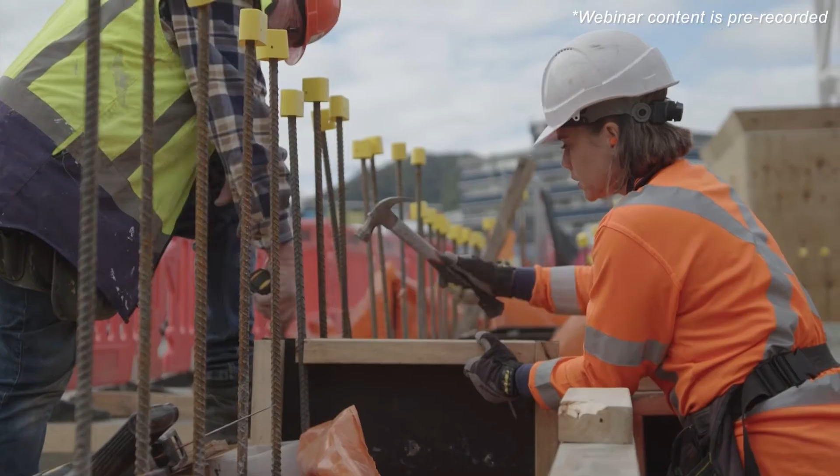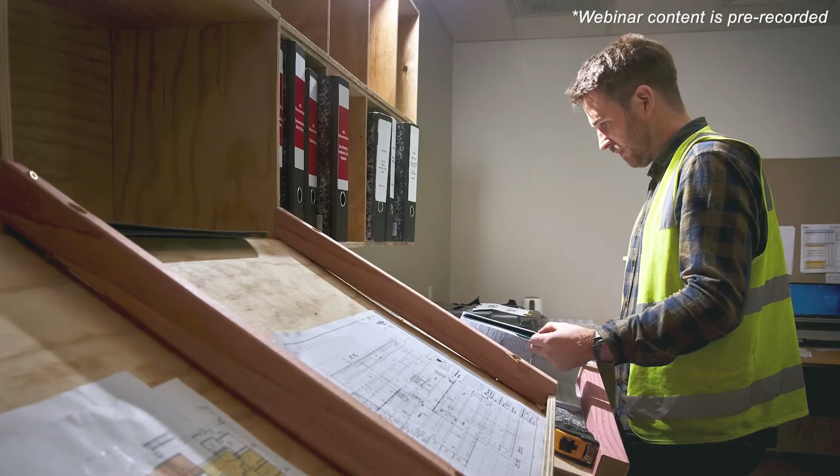Construction touches us all in some way, and its success is crucial for a better Aotearoa. The Accord was launched in April 2019 to try and address the many issues affecting the sector. The Construction Sector Accord is the first step in creating a strong partnership between government and industry. And the partnership is to create a high-performing construction sector for a better New Zealand. The Accord has big goals: increase productivity, raise capability, improve resilience, restore confidence, pride and reputation.

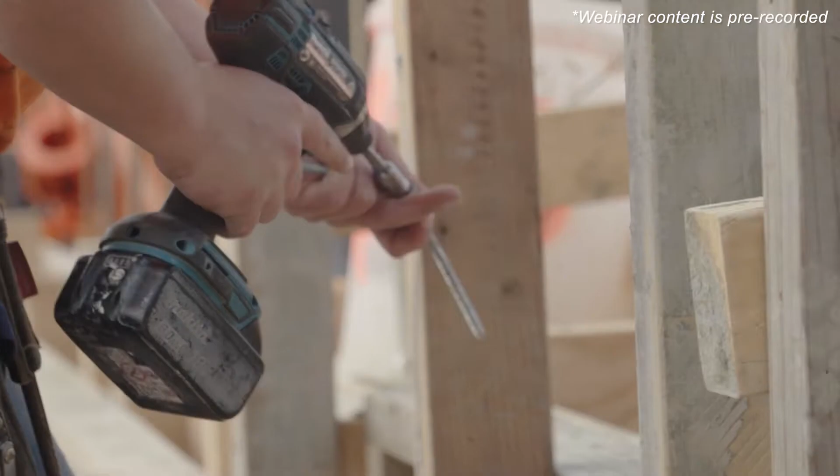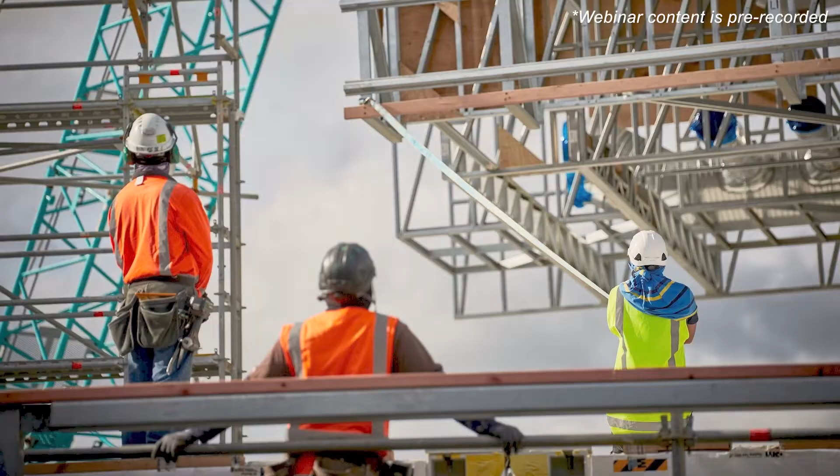The Accord's work is about driving long-term culture change, from increasing diversity in construction to reducing carbon emissions. We want to see better business performance, better leadership, better health and safety culture, including mental health, fairer risk allocation. We want to see a safer, more successful, more sustainable construction sector. By working together, we can achieve that vision.

So one of the key things we've done is we've invested in a collaborative environment called Revizto. And so that enables all of our external design teams and internal design teams to come into the one space, coordinate their design in the digital world. And for us, that reduces the risks in the physical world when we're actually on site. So it lets us be more in control and gives us more confidence about what's happening in the design and how that's being coordinated.

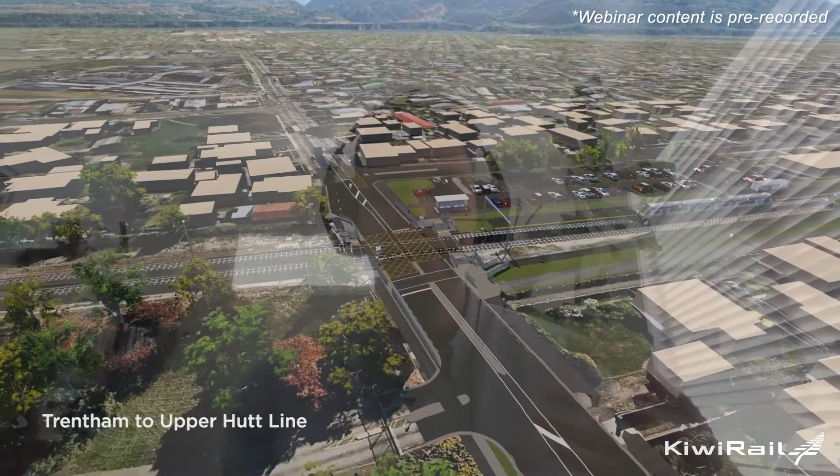So the other part of that is KiwiRail's taken the kind of bold step to provide all of the licenses for that software. So for us, we provide licenses to both our internal teams and our external teams, because we don't want that to be a barrier to people having access to the information. So that's 3D and 2D information.

And for us, that means a license is a lot cheaper than some of the cost of when things go wrong on site. So yeah, it's a good example of the things we're doing. Now, I've seen the video on this one, your Digital Shields project. This is seriously cool. Tell me more about it.

Yeah, sure. So the Digital Shields was something that came out of the BIM pilot. And the BIM pilot for us was where we started doing digital engineering, and that was the genesis of the digital engineering program. So again, it speaks to we need to be more productive, but also we don't have a lot of access to the rail corridor, and we need to keep our people safe.

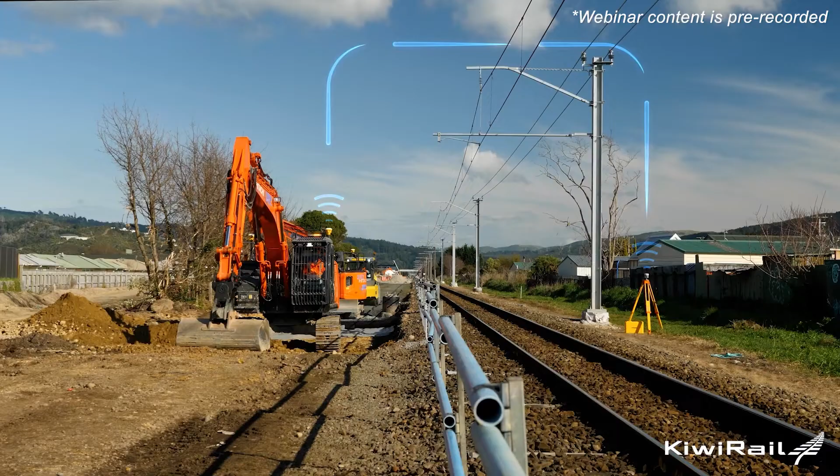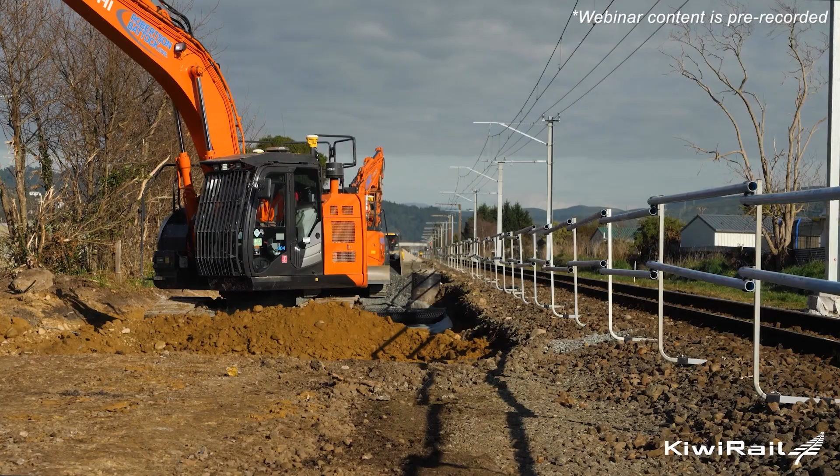So that's something that was trialled on the Trentham to Upper Hutt project in Wellington. And over the last 12 months, we've been going through the processes of all the documentation and all the other bits and pieces to scale that up and make it part of our BAU for our business. So the next two big projects that are currently using it are the Plimmerton upgrades down in Wellington, and then the Wiri to Quay Park project in Auckland. So what are the key outcomes for you?

Yeah, I guess everything we did under the BIM pilot proved the value of scaling the DE program across our capital works portfolio. So for us, there were four key objectives. It was store data in one place, and that led to us developing our own common data environment. Reduce risks in construction, so that was where our collaborative environment, Revizto, came into play, and that's what I was speaking to around, coordinate it in the digital world before we go into the physical world.

Produce really good as-builts. So we know that when we're doing capital works projects, we've got a massive opportunity to capture some really good data about our assets that will be used well beyond those projects. Typically the industry is not so great at capturing as-built data and handing that over to asset owners, and that's just for a number of reasons. So we're really working in that space to develop that information.

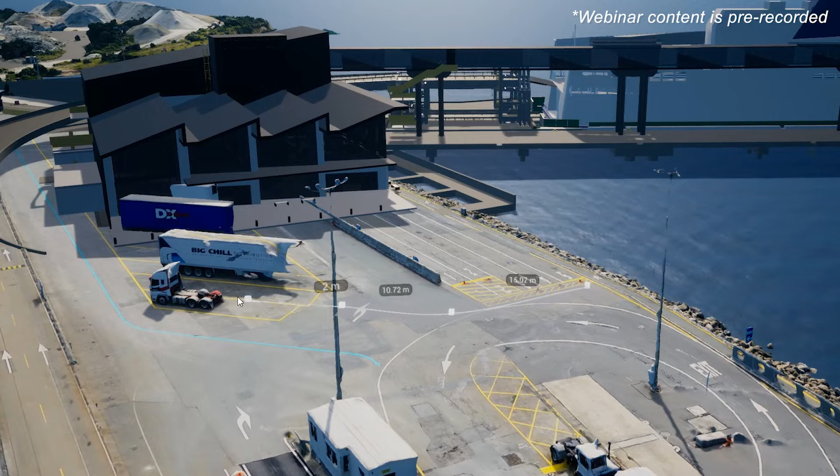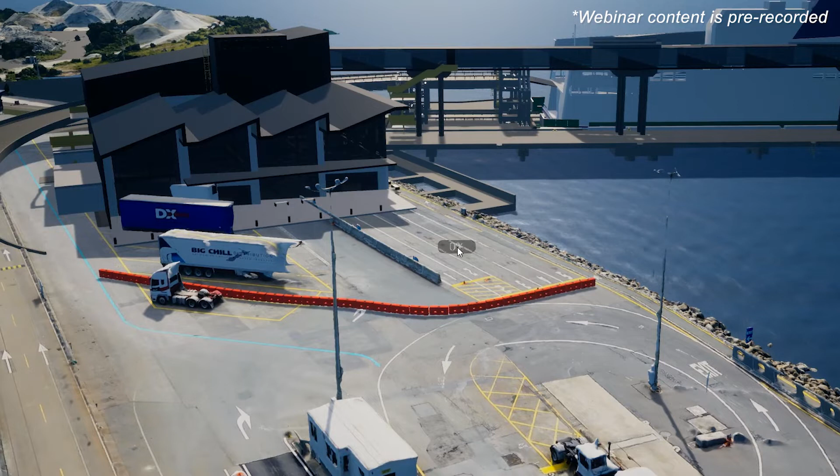One of those key things is gamification. So we're doing a lot of work around bringing information into gaming environments so that people can interact with it in a different way. We have a lot of stakeholders, both internal and external, that need to be consulted with to get their input into things. And traditionally, they would often get a technical drawing and they might not be from a technical background. And so their input might get lost in translation, or what is being asked of them might get lost in translation. And that can result in things not coming to fruition and challenges later on.

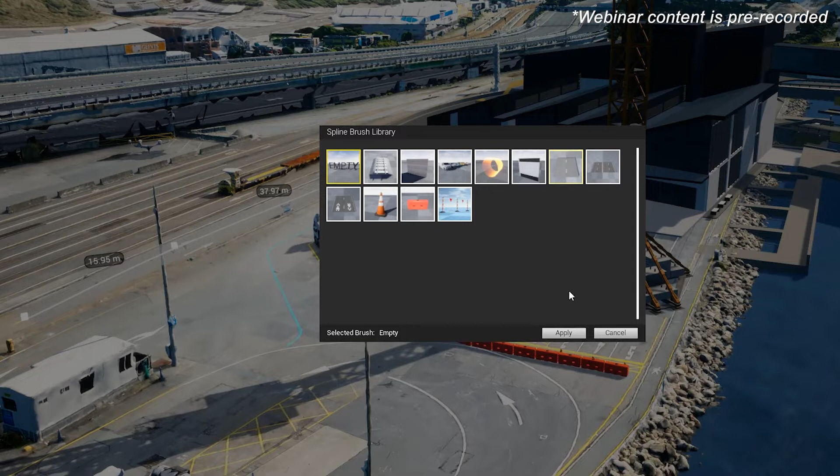So one thing we've been trialing with the IREX project down in Wellington is we've brought the design into a gaming engine, and then we're using that gaming engine to interact with different people and show them the design. We can put things in the environment on the fly. In there, we can put in temporary roads and cranes and things like that and show them what the impact would be while we're doing that and get their feedback on that.

Oh my God, I actually just said search up. Blame our kids for that.

By the way, here at the Accord, we're working with KiwiRail on an asset owners forum. And this is dedicated to creating consistency with digital change and data requirements across the sector. The forum includes groups such as Waka Kotahi, University of Canterbury, Let's Get Wellington Moving, and Auckland Transport.

And look, more generally, we're really pushing that sort of peer-to-peer horizontal learning network. That is the best way to learn.

Anyway, next up, Johan Betts from Offsite Design. Kia ora, Johan. Thanks for the introduction. Great to be here and looking forward to sharing some thoughts about offsite manufacturing and offsite construction. So, Offsite Design, a leader in designing and manufacturing prefabricated timber buildings from small residential to multi-storey commercial. Firstly, Johan, offsite construction, why is it so important for New Zealand?

Yeah, prefabrication and offsite construction, the way we're using the terms, is really just a catch-all term for a whole bunch of methods, systems, techniques, technologies that allow us to build away from site and assemble quickly on site. And that means we're covering a huge spectrum of types of construction. Panels, open and closed, 3D volumetric modules, whole buildings, and across all the materials, so concrete, timber, steel, etc. And that means it's actually quite difficult to talk with people about prefabrication and offsite construction.

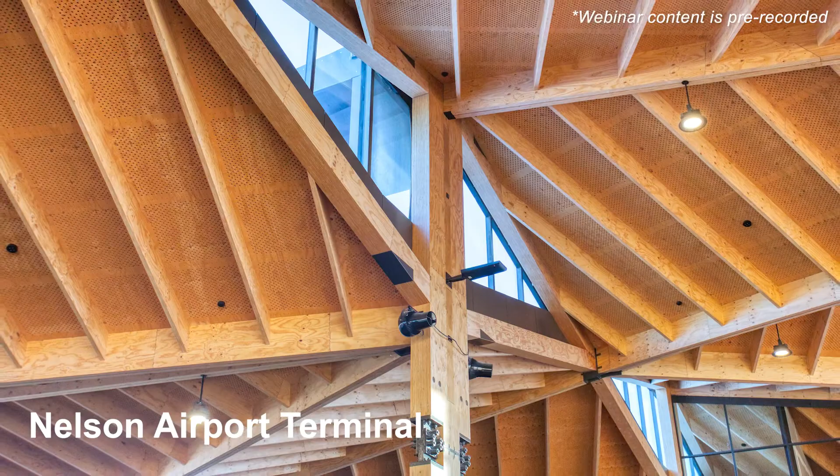In the commercial space, the projects we're working on are typically mass timber, multi-storey. So that's typically 3-4 storey public buildings. There's a number that we're involved in at the moment down here in the South Island. So that's the Ashburton Civic Centre being built in Ashburton at the moment, a Polytech building down in Dunedin, and another mass timber building going through that pre-construction process at the moment that's going to be built on the AgResearch Lincoln campus.

But one thing to point out really is that Offsite Design, on most of these projects, is getting involved after the design has been finalized. And the role we play then is that we coordinate and we find the details that are not producible in the factory or not buildable on site, and we help the prefabricator and the contractor through that. So the point I'd like to make is that very few projects in New Zealand are actually optimized for this offsite manufacturing and offsite construction process, and that's where New Zealand needs to do some work.

Other types of work that Offsite Design gets involved in is consulting to the prefabricators, so essentially helping prefabricators get into prefabrication. So if there's a prefabricator and they want to start making things offsite, then we can do some consulting on their building system, help firm up that system, and even sort of help with tailoring a factory around that.

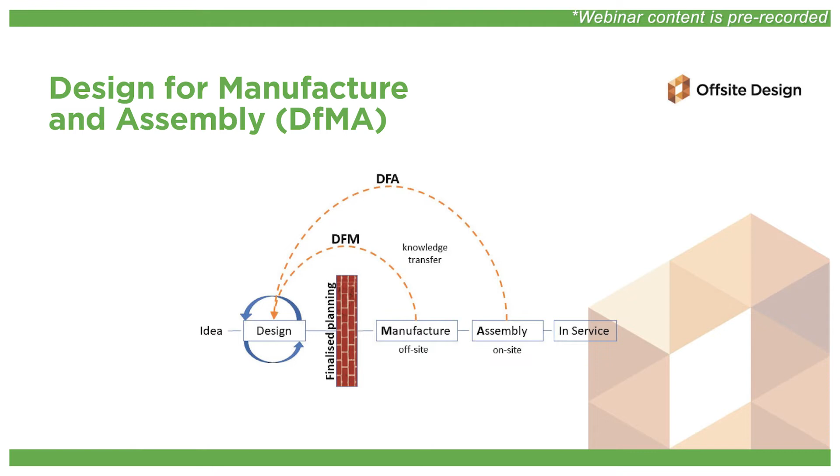And it's impossible really to overstress the importance of that. It's also something that typically designers, architects, engineers can't do by themselves. So DFMA, Design for Manufacture and Assembly, it's really a collaborative process involving a contractor and supplier early. So that's a big barrier, that the projects that are being prefabricated in New Zealand, very few of them are really optimized for true DFMA.

Another one, and that goes really hand in hand with the first point, is the procurement. If design of an offsite project is contractually separated from the construction, then it's really impossible for that manufacturing or offsite assembly know-how to flow through to the design stages. So instead of separating design from construction contractually, offsite projects thrive in procurement methods where design and delivery are integrated.

Design build contracts, collaborative alliances, early contractor and supplier involvement. These are sort of the models to get around that, to make sure that projects are informed early with that manufacturing know-how and that assembly know-how that is required for these types of projects. So essentially, projects need to be optimized for prefabrication during the design stage, and that's the biggest barrier. That's particularly true for the commercial multi-story type projects.

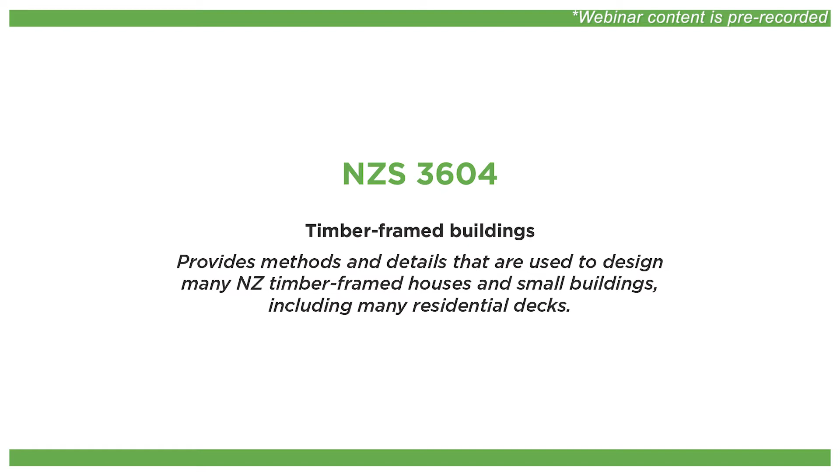So what New Zealand would really benefit from is a standardization in this space. An analogy I'd like to use: New Zealand houses are built at the moment timber framed using NZS 3604 as a standard. In some ways we require the same thing, just an OSM version of that. If we do 3604 type residential buildings as an offsite fabricated process, what does OSM 3604 look like? There's no need for New Zealand to have 10 different approaches to closed light timber frame panels. It just confuses designers, complicates it for councils, and complicates things.

But again, to be clear, I'm not proposing to standardize architecture and floor plans here. No one wants that. No one wants cookie cutter. I'm proposing to standardize the OSM systems behind this typology, light timber frame, for example. And this is, I guess, a step in the right direction.

Last year, the government passed a bill streamlining the consenting process for off-site modular building. A new voluntary certification scheme where manufacturers who meet certain requirements can access certificates that cover their complete design and manufacturing process. So will that make a difference for businesses like yours? Oh yeah, the modular component manufacturer scheme. Definitely a step in the right direction, and quite a big achievement for a small country like New Zealand.

And actually, I'd like to give a bit of credit there to Scott Fisher and Offsite NZ, formerly Prefab NZ, for doing excellent work corralling the industry and doing some lobbying with the government. So definitely a good step in the right direction.

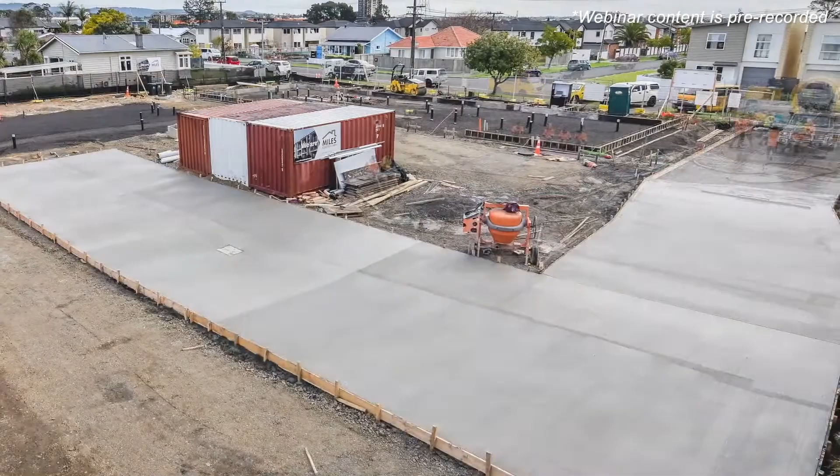We already know that these buildings can be built faster, and particularly installed on site faster, which is really important when you've got neighbours who we're disturbing with our construction. The quicker we can get in, get out, and more importantly, move customers in, the better.

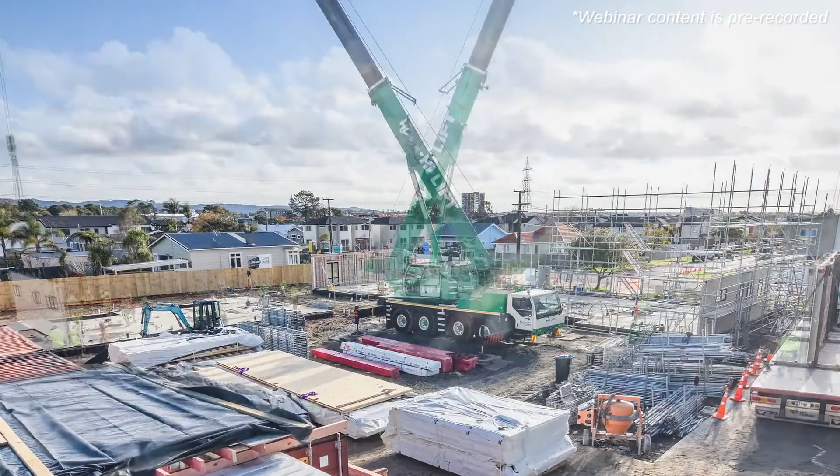I think the other aspect is if you can move into a highly repeatable use of offsite, you get less variables. There's just streamlining of the whole process.

And then, of course, there are other benefits which are also important to us. We're really trying hard to reduce our construction waste, and using offsite manufactured techniques, you've just got a built-in benefit there because you're controlling everything in a factory environment.

And then there's other benefits. We see health and safety benefits overseas, where there are less people working in an on-site environment, out in the weather, and you're just able to control and manage the build process a lot more. So yeah, lots of reasons for us.

We've been pretty clear that this is a direction of travel we want to take. We launched our offsite strategy at the end of last year, and in that we made a commitment that we wanted to scale up our use of offsite manufactured homes by about 20% a year. It's really important to us that that growth is sustainable, both for individual companies and for the sector as a whole.

We currently work with about 18 of New Zealand's offsite manufactured suppliers, and we're engaging with probably double that. So we do want to talk to any suppliers out there who think they've got capacity and might be able to supply to us.

Hey, look, I've been dying to find out about this stuff. Part of your offsite strategy is using prefabricated bathroom and laundry pods, so fully built. Whack them in. How does that work?

Yes, so this is something that's underway right now at Kāinga Ora, and it's really a research and development program. But it is real homes that we're building for people to live in.

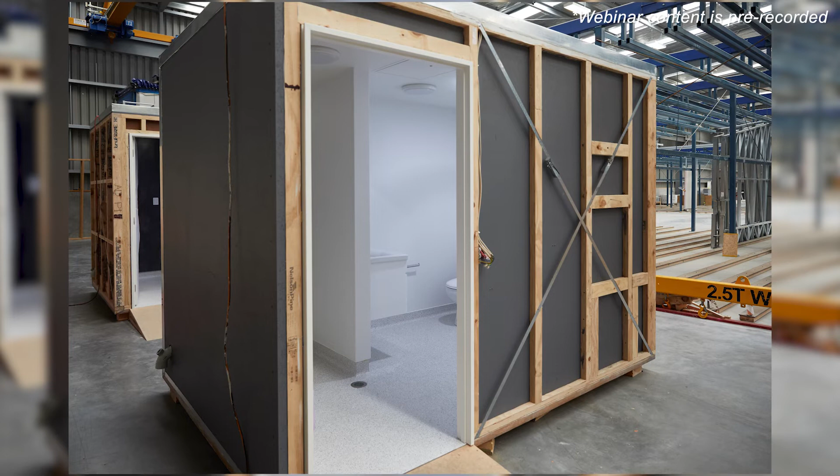What we've done is look at and use different combinations of offsite manufacturing technologies, and these have included something called bathroom pods, basically a whole bathroom built off-site and then craned in and slotted into place within the apartment.

In this R&D program, we've used bathroom pods from a number of different suppliers: New Zealand-based Concision here in Christchurch, where I am at the moment, Interpod, who are Sydney-based, and Sync, who are Melbourne-based. So they've all been included in a trial across 4 different build projects.

One of these, in Blockhouse Bay in Auckland, was built by Miles Construction, our build partner for that project. This is a 3-level apartment block with 18 homes in it, completed last year. Each of the homes has got a bathroom pod that was supplied by Concision.

And then the project also incorporates something called cross-laminated timber panels. So those are 100% renewable timber panels.

It was really important for us as well, that this was also the first project, our first OSM project, that achieved the 7 Homestar rating.

So what we're trying to do with these pilot projects is really evaluate these different technologies and combinations of build methods, learn the lessons, and then move them into other parts of our program. Right now for the bathroom pods, we're in the evaluation phase, using that to make the decision about whether this is something we want to roll out into our wider program.

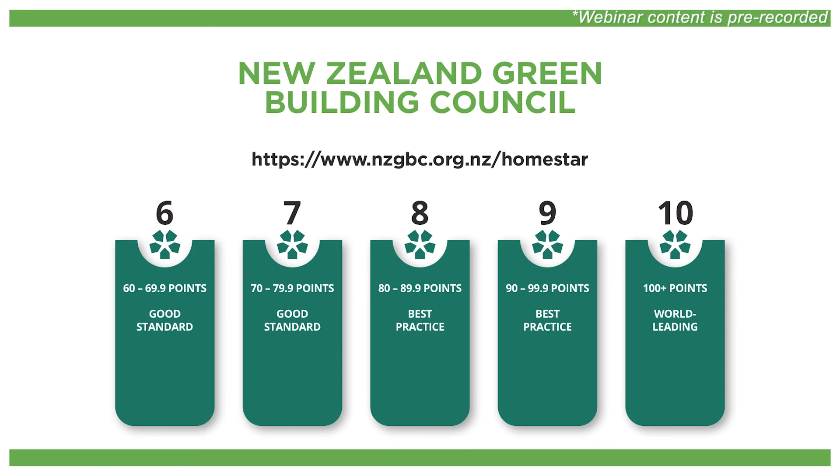Really, we're studying the heck out of it because we want to understand everything about how these different buildings perform, what they cost, how long they took us to build, the carbon profile of all of them, the energy use profile, how the customers respond to them, and all of these aspects we're really keen to share with industry, because we've got a unique opportunity here to study a real building, a real construction process, and then these homes are obviously homes for people, and we really want to understand how they work for the people who live in them.

Oh, kia ora, Ryan. I feel as though we're going to have to come back to you in a year or so to find out about outcomes from these projects and your views on comparisons between the different methods.

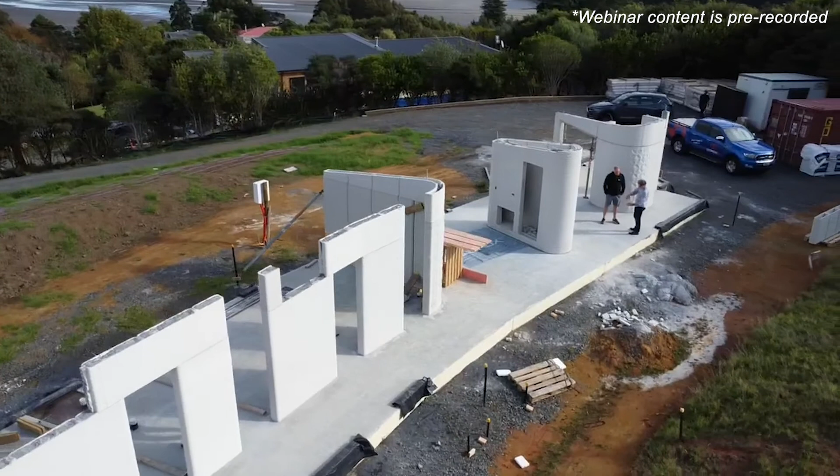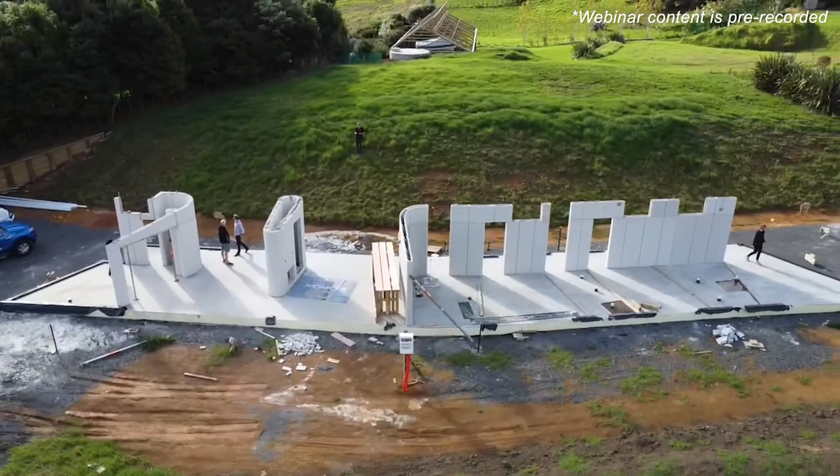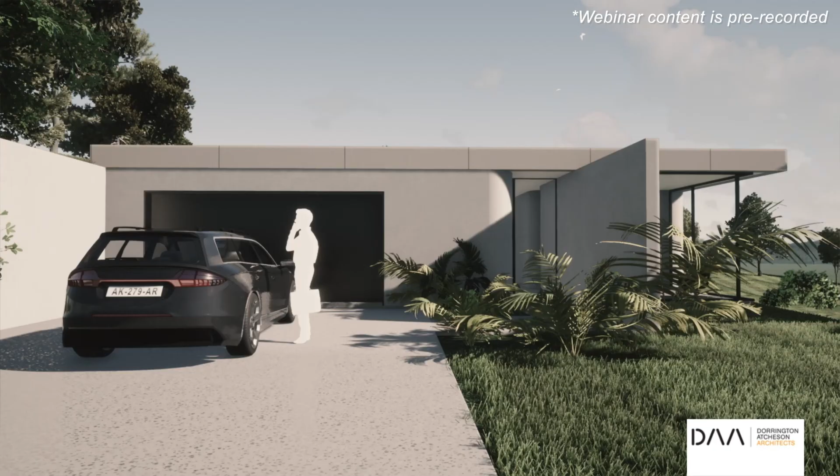And it will be in Paremoremo in Auckland. We got our building consents and we started to print the walls, and they already started to pour the slab. So the main advantage we're giving the client is that we are at a similar price point to traditional construction, but we're a lot faster.

And we're able to do a lot of things that traditional builds are not able to do, like curved walls and very unique designs. If the client tried to do something similar with traditional builds, it would have been out of their budget and out of their affordability.

How does it actually work? Tell us about the technology. So when we build houses or commercial buildings or anything, we have 2 options. We can print the wall or the elements on site, or we can print them off-site.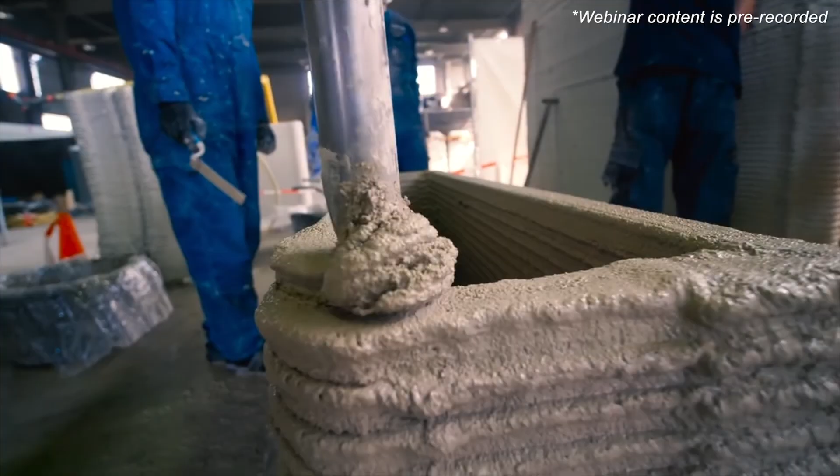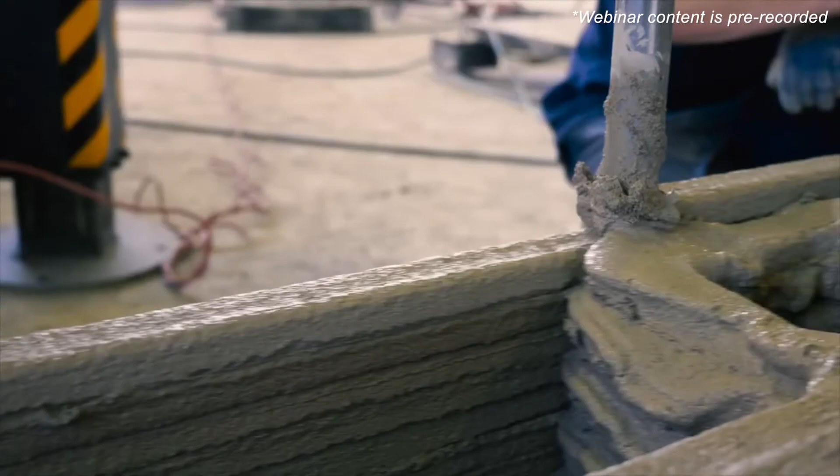So what we do is print the walls, and these walls have structural cavities and insulation cavity for external walls, and for internal walls, it's just 2 layers. This way we can have one wall that comes to site, or is printed on site, that's completed, does not require any finishing from the inside or outside, and is very durable and waterproof.

So what this gives is that the thermal mass of the concrete makes the house a lot more economical to heat and cool, and there's around 20% saving in energy consumption for heating a concrete house compared to a timber framed house.

Now, obviously, this is seriously innovative stuff. How hard has it been to get it up and running in New Zealand? What sort of obstacles were there? How did you get over them?

Some of the challenges we faced were around how unique the building standard is in New Zealand. So a lot of the testing and the designs that were available and done overseas were not applicable for New Zealand. We had to reinvent the wheel a little bit.

And the second thing is that the construction industry overall is one of these industries that when it's booming, nobody has time for innovation, and when it's bust, nobody has money for innovation. We're quite comfortable building the way we build, and the end result is there's no incentive for innovation. There's no people pushing the envelope, not trying to do more and more creative stuff.

COVID has changed that a little bit because of the bottlenecks of the supply chain, the lack of resources, and shortage of labor. All of this is putting pressure and forcing people to think outside of the box. I believe this will help us move forward, and we're getting more traction because every week I'm talking to new people. A lot more people are excited about the technology, and they see a big potential for it in the market and how it could help the construction industry.